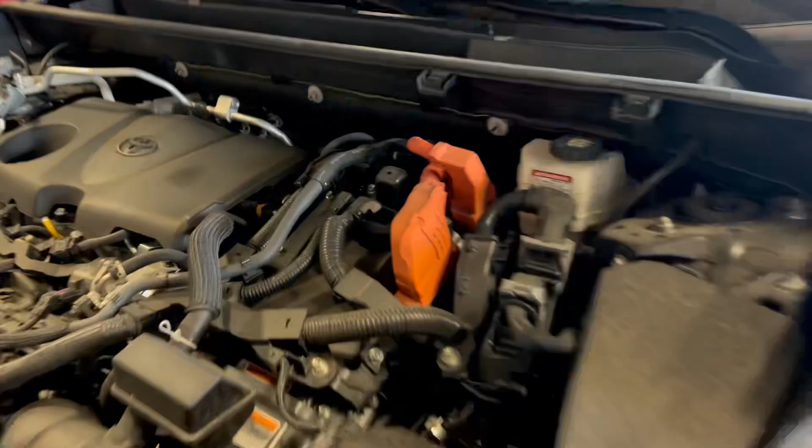Good morning. About to do my 30,000 mile service on my 2022 RAV4 Prime. This is a plug-in hybrid, 2 years old. But it does have a regular gasoline engine. I've got it running on defrost right now, which keeps the gas engine running so it's good and warm. You can see how cold all the lines are, the AC lines. They're freezing, so leaving it in full defrost will start the gas engine. I debadged it, so the badges aren't there anymore, but as you can see, it is a Prime.

Anyhow, I got my filters, my cabin filter, my air filter.

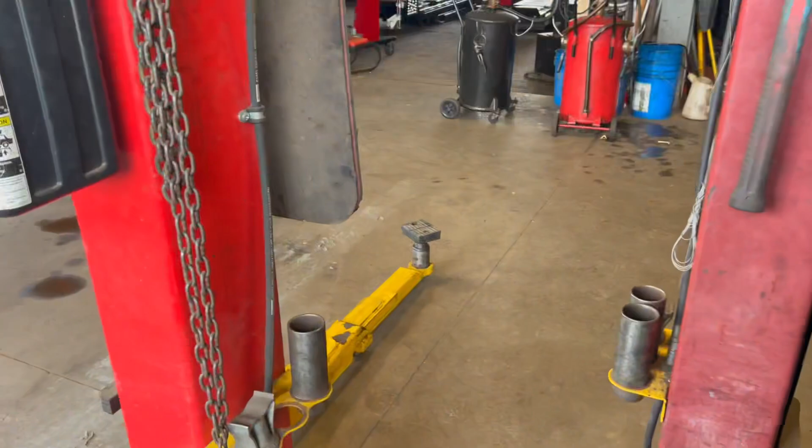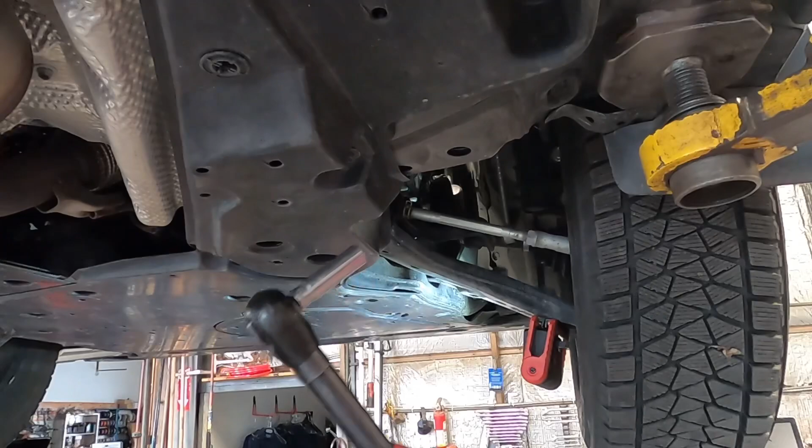The first step to the oil change is taking off the splash shield, 10 millimeter. There's 4 of them. I know I'm cheating, but if you got them, use them. Set that to the side.

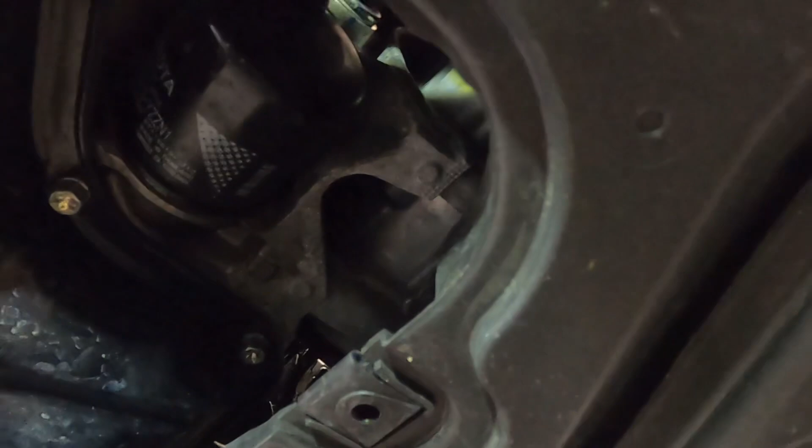And there's your drain plug. And if you look up here in the corner, there's your oil filter. So everything's real easy to do. Of course everything is in really good shape. It's only 2 years old, it's only got 29,800 miles on it.

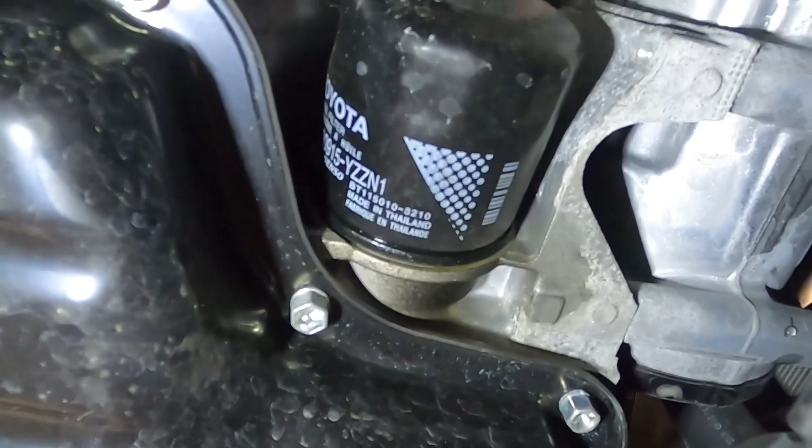And that is your transmission check plug for checking your fluid level, so we'll be checking that as well. And there's your oil filter. So, quick look at the car, shows there's not much going on here to concern myself with.

With the car in the air, we'll do a quick inspection. I pulled the wheels last week, so I won't be doing a tire rotation today because of that.

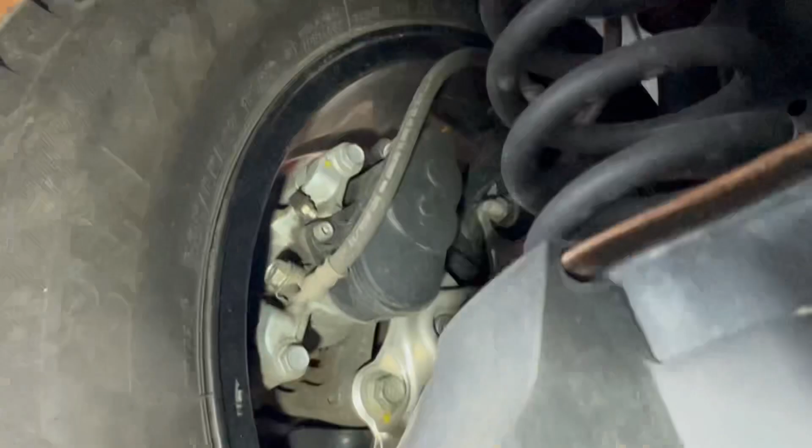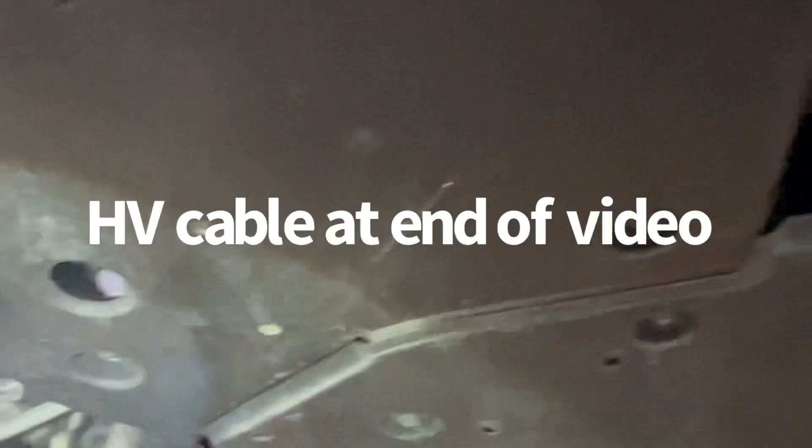Put my winter tires on a week ago. Car's in good shape. Up here is that cable everyone's talking about, the high voltage cable to the rear motor. They call it cable gate. My car is not affected by that at all. I pulled it down and checked it last week. I'll attach that video. Everything's in good shape, and here's the shield for the high voltage battery, the belly pan.

So when you set the car on a lift, you don't want to put your lift pad here. You want to keep them out on the edge here. You can see I'm right in the middle where I'm supposed to be. Same with over here, want to make sure you don't catch this belly pan in here. That shield. Car's safe, it's where it belongs.

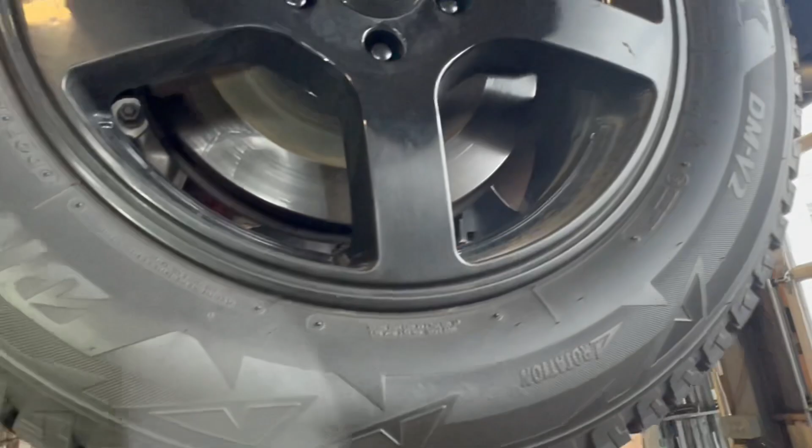And these are my winter tires, Bridgestone Blizzaks, and these are some cheap aftermarket wheels. These tires are amazing. I see they do have a rotation on them, but we won't be rotating tires today—I did these last week, like I said. These are 17-inch, 225, 65, 17s.

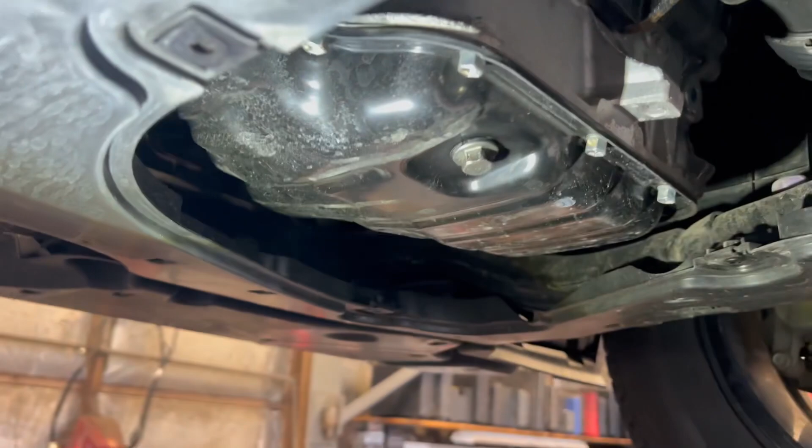All right, we'll start by draining the oil, and I believe this is a 14 millimeter. So I got a 14 millimeter here. Pretty hard to see, but it's 14. And so I've got to come in this way. Wow, that's tight—dealer tightened this, and it calls for 28 foot-pounds, and it was tight, at least that, maybe more. We will be tightening it to the proper amount.

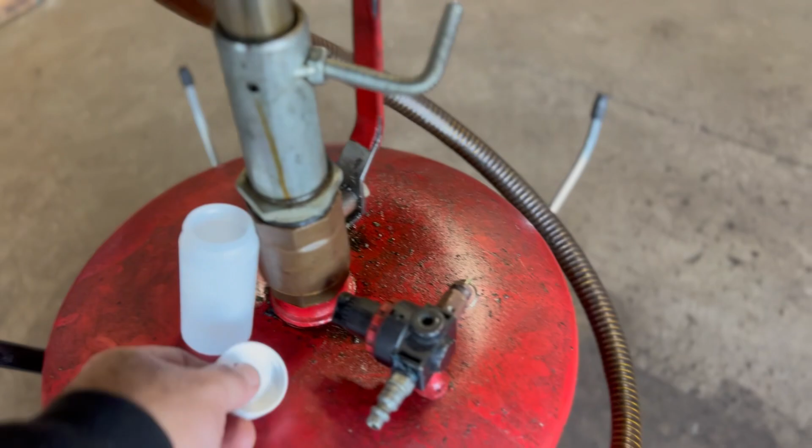Before I drop this, I'm going to get my Blackstone oil container ready to take the sample. Here we got our Blackstone container ready, all set to go. We're going to let the oil run a couple seconds, then take a sample. That's going to be it. All right, here we go.

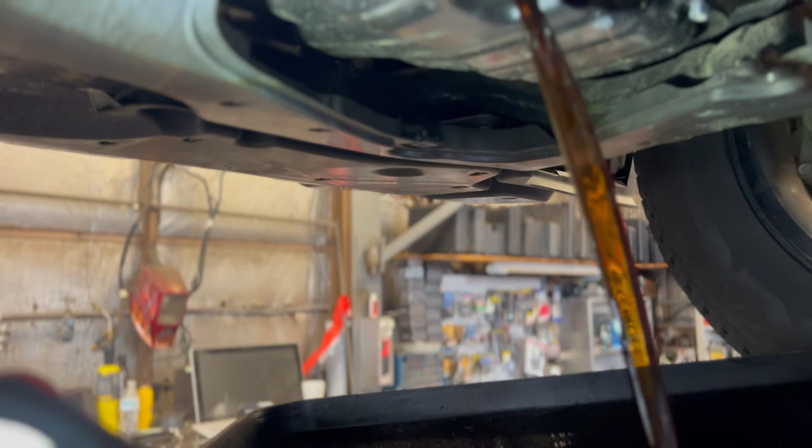Try to do this without making a mess. This oil is probably thin, it's 0W-16, it's like water. Oh yeah. As you can see, it's very clean. I'll pick right about now—1, 2, 3, there we go.

There's our sample. According to the odometer, this oil has 9,900 miles on it. Oh boy, we're leaking—what is going on here? Oh, hit that filter, look at this. Look how easy it is to make a mess. That's because I didn't take that filter out of there. I don't care how much I try, I always make a mess. So anyway, take a minute, clean this up, let this finish draining, and I'll get the oil filter off.

Usually the oil is very clean. Again, according to the odometer, 9,900-some miles on it. But that doesn't tell the whole story—this car is a plug-in hybrid.

All right, we'll do my oil test. That's clean, you don't get much cleaner than that. My oil test is just check the color of it, that's it. Blackstone will test the oil for sure. I don't think it's going to be an issue.

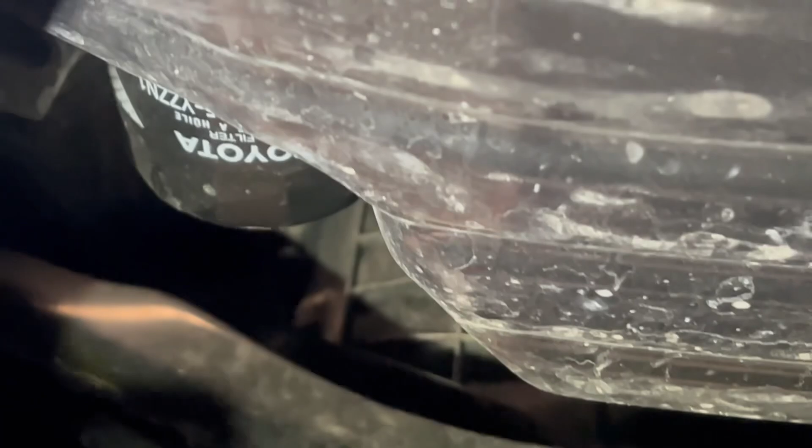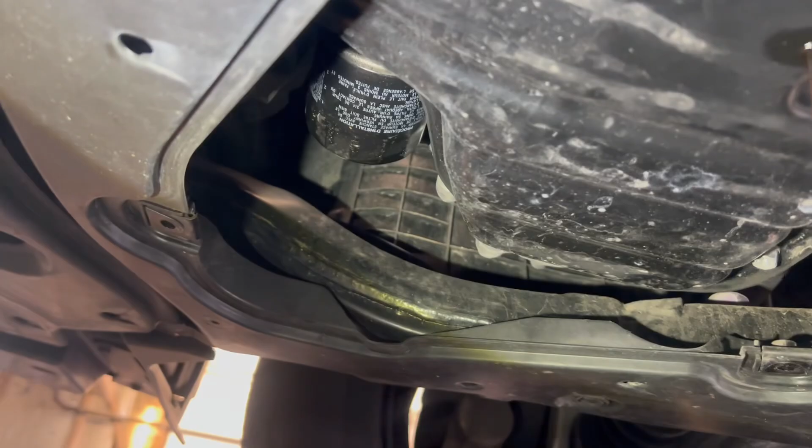All right, time to do the oil filter. Once you got a wrench on it, it's not too bad. Gonna slide forward a little bit so I don't spill nothing, or at least I spill less. I seem to spill everything.

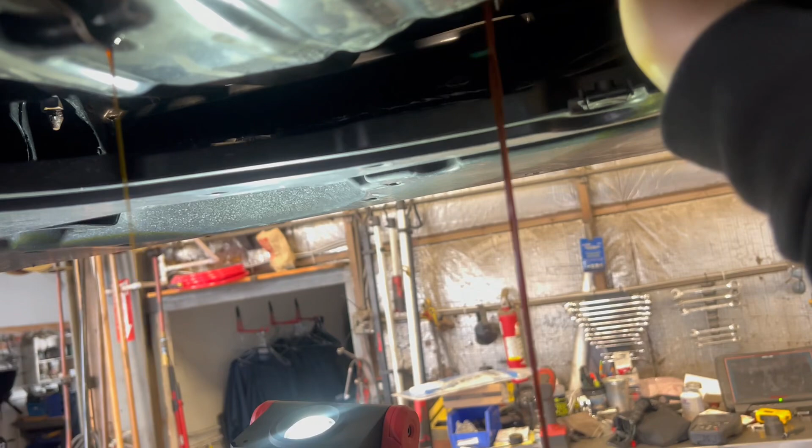Like I said, this has only had 2 oil changes on it. They're both done by the dealer. Let that drain for a minute, and... very clean.

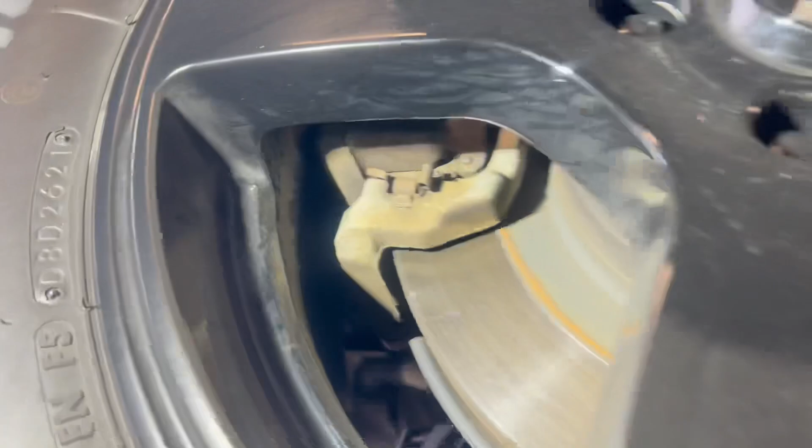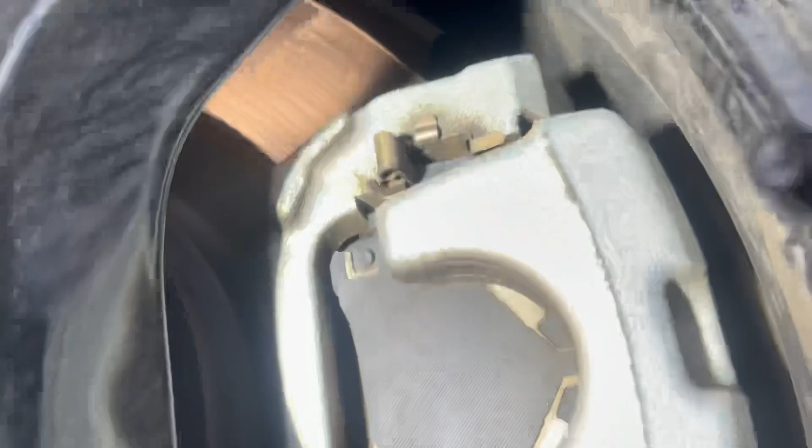All right, the visual inspection on the brake pads. You can see they're like brand new, out at the very top. There's literally no wear on these things. They hardly ever get used. I think they're gonna rust out before they wear out, just because it's a plug-in hybrid. It's got, I believe, 100 some horsepower of regenerative braking. So as long as you're careful about how you drive, and drive like you're paying attention, don't slam the brakes, your brakes will last a long time on one of these cars.

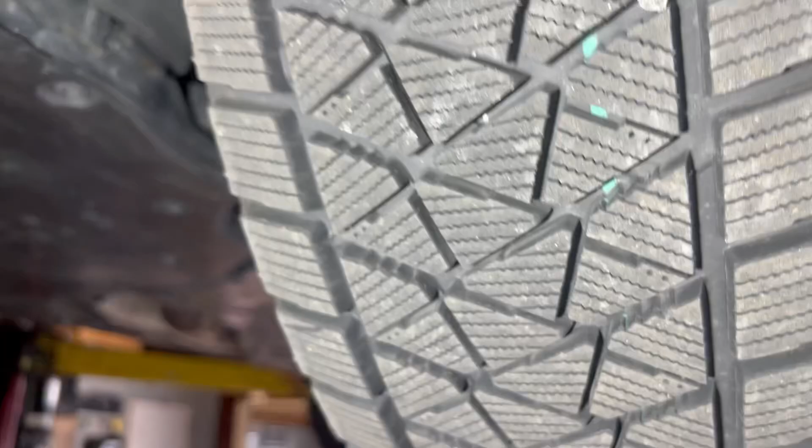Had these off last week. They're perfect. Again, there's a tire rotation symbol. These are Blizzak DM V2s. They're amazing, look at all the siping on them. You can still see the marks. They're brand new, so we won't be rotating those.

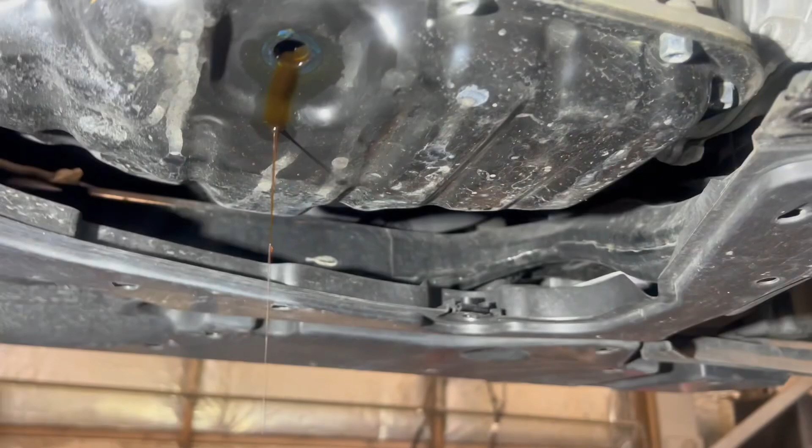Just gonna let the oil finish draining here, and it's really, really clean. In the meantime, I'll get the new filter ready.

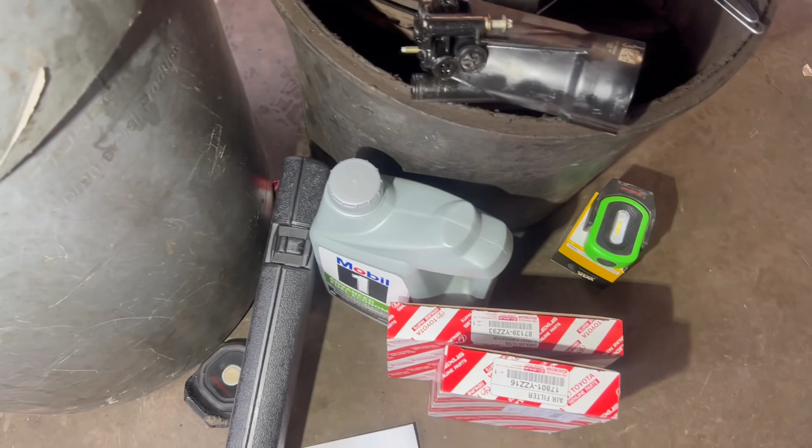We've got some of our stuff over here: our cabin air and engine air filter, our motor oil, and our bill of sale. And hidden under my torque wrench is my engine oil filter. Inside the box is the new crush ring.

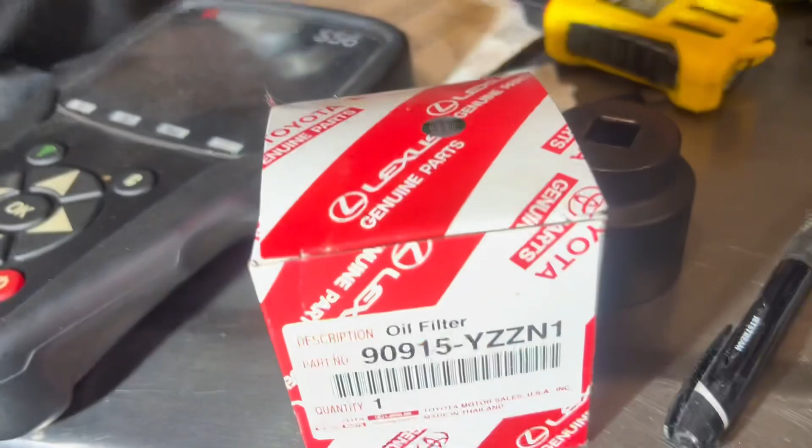Don't know if it's necessary, but from looking at the original, I don't think they ever changed it at the dealer, so I'll do it. There's the part number for the oil filter, there's the crush ring, and I'll get you that part number as well. All right, here's all the part numbers - I believe the first one's the air filter element.

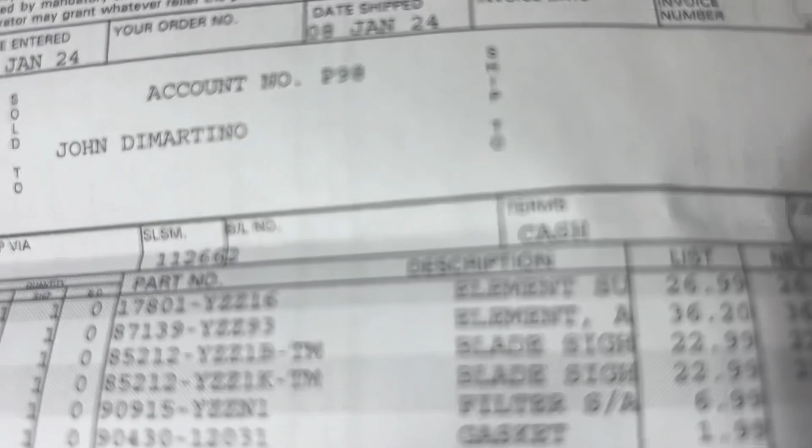They didn't give me any deals, that's for sure. The last car, they would give you 10% off on. Now this place changed hands.

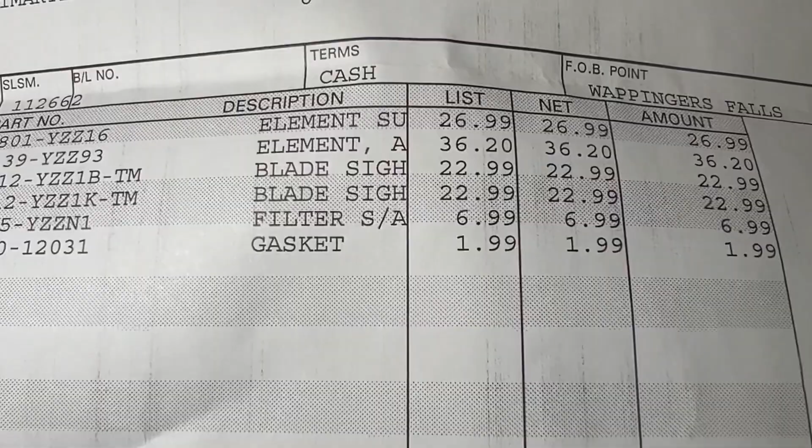The bottom is the crush washer, $1.99 for that little thing. $6.99 for the oil filter, that's fair enough. I also got a pair of wiper blades for it. So all told, with tax, it came out to $127.75.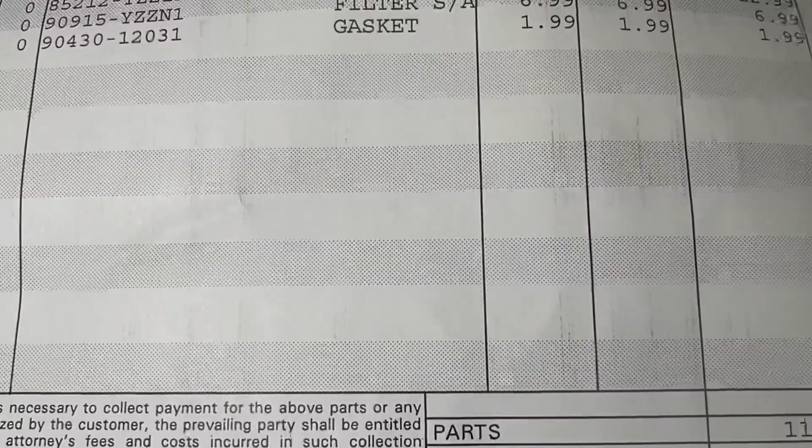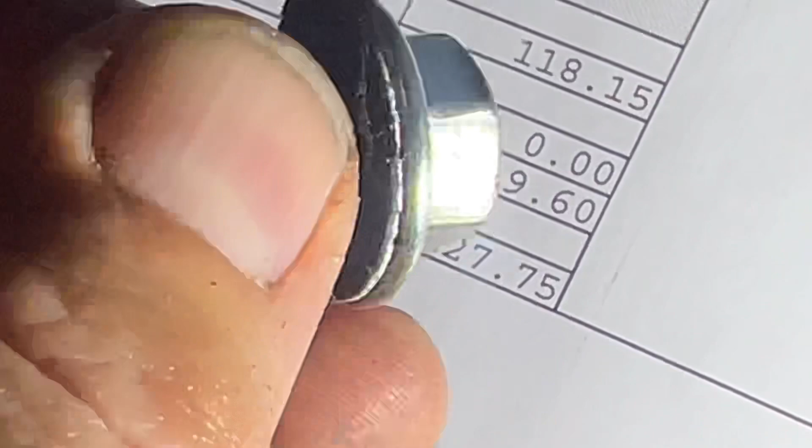And there's my name. So here's the crush washer. Looking at how embedded it is, I'm going to guess that they didn't change it at the dealership - I'm going to say it was used a couple times. It's smushed pretty flat, so I'll try to get it off here. Yeah, I can't get my nail in there.

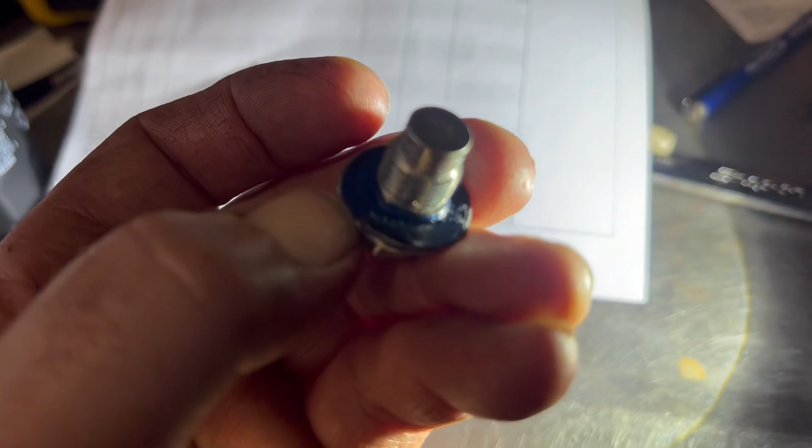We'll get the new one on. I'm gonna have to get that with a little pick. All right, I tried for a couple seconds there - before I cut my fingers open, let me go to the vise. This thing is in there, let me tell you. There we go. Just a shot in the dark here - I'm gonna guess it wasn't changed. There's the old one. Oh, focus is so much better when I zoom in.

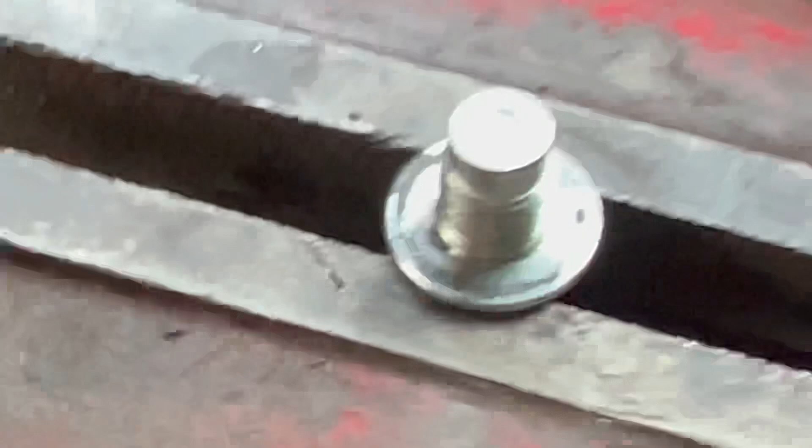So we'll replace that, put the new one on it, we'll be ready to go. All right, old one's off. Here's a new one, and it won't focus again. There we go, there's the new one. I'm glad I got that - definitely needed it. We're going to put it all back together now.

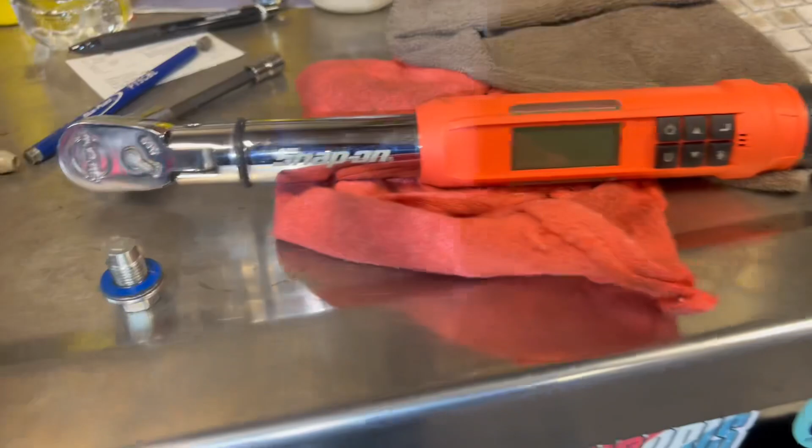Drain plug, socket, torque wrench. 28 foot-pounds, let's go. Really mint.

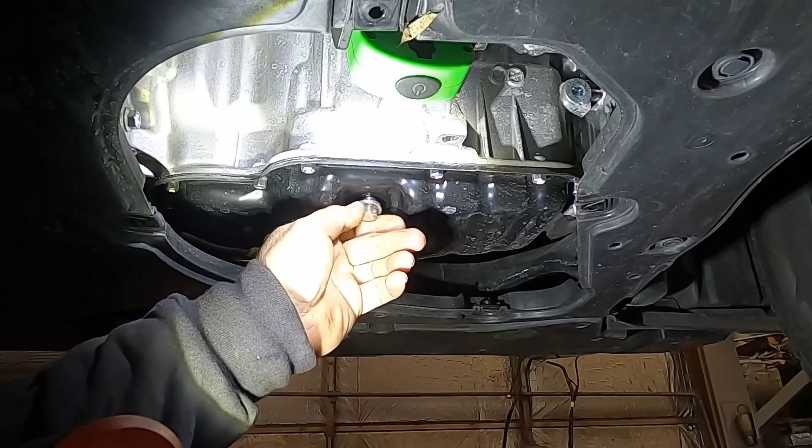At first I was gonna sell it with a bad head gasket. I know I'd get $2 grand for it. Yeah, with a bad head gasket. You're killing me, bro.

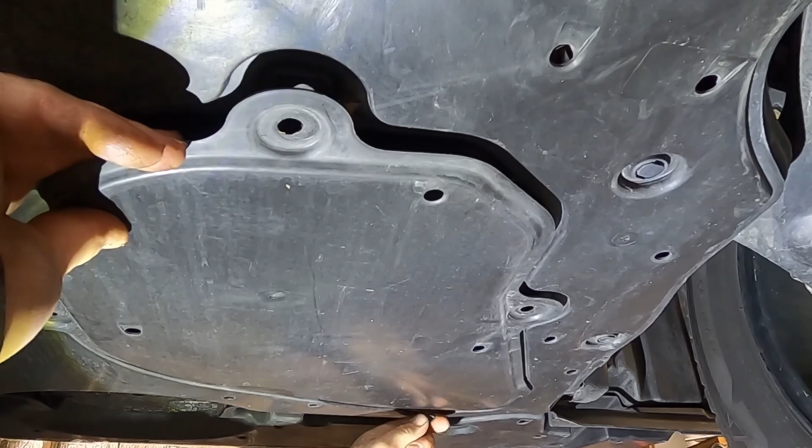It's okay, hang on one second. Now we're gonna put the splash shield back on. It kind of clips in the front, holds itself up. Really? And the rest just goes over.

Don't tighten these too much, they'll strip out. They don't need much.

That's that - where Bella's pet usually is, over by the camera. Your car is so mint, I love it, that's my favorite car in the world. Do you feel the brakes though? Yeah, I got to work on it, baby. I know, it's pretty. I'm telling you, if I was only allowed to have one car for the rest of my life, it'd be that car. Really? Yeah, I love that car. I get so many compliments on it too.

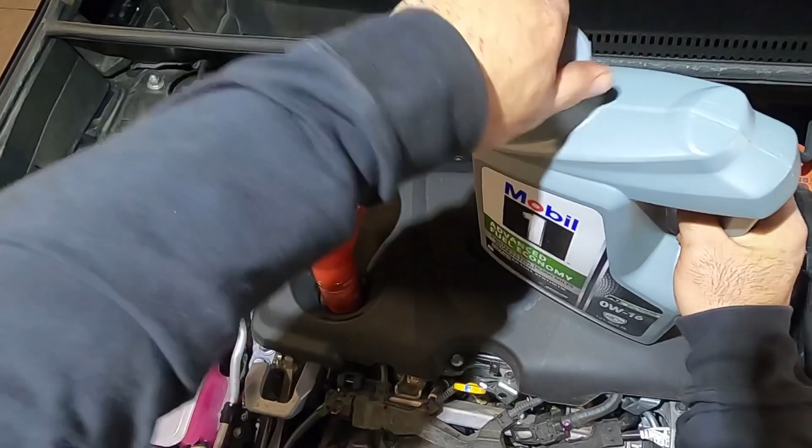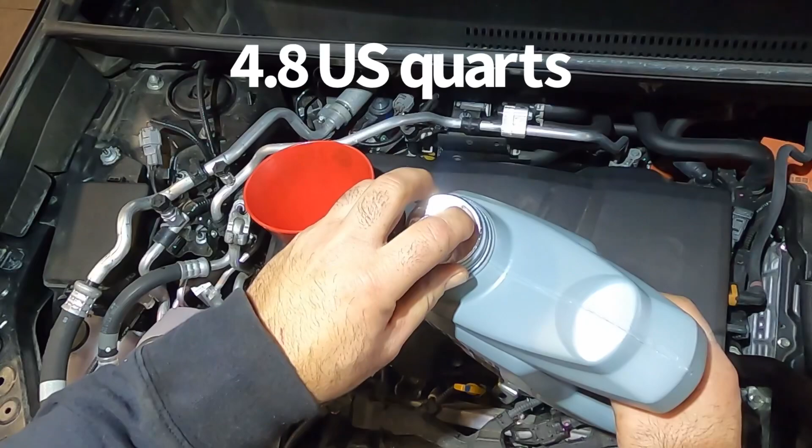Anytime you want - I got a helper here today. 4.8 quarts of 0W-16. Good job, Eve. Thanks, Eve. You're welcome.

Did you get that alert on your phone? The national weather service? Yeah, was it wind? Just about takes the entire jug. What? Where? You know what, somebody told me there was one on Plains Road, and I was just like, yeah, whatever.

Was it like somebody got shot? Or was there a guy pulled out of there?

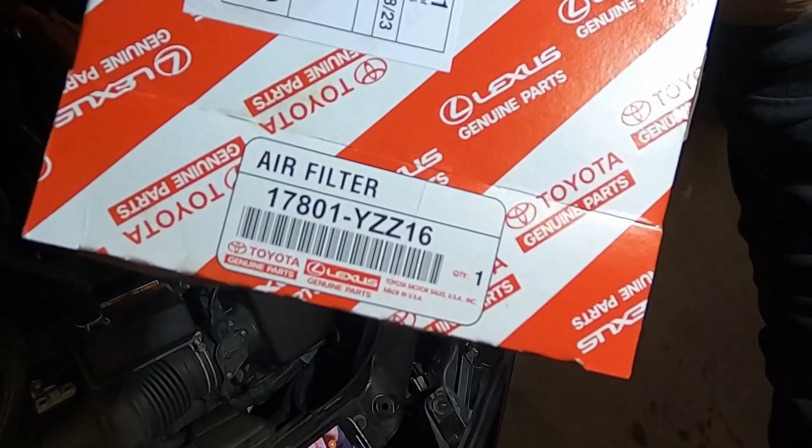Here we got the new air filter. That's the part number. Got 2 clips here, 1 and 2. Pull up and back at the same time.

You got to walk it around the cowl here. You can reach underneath. Slide it out. And there's a new one for comparison.

Put your new one in. Air box is clean, no reason to clean it out. But if it's got leaves or crap in it, get a shop vac and suck it out. Back in.

1 clip, 2 clips. That's it, you're done.

Time for the cabin filter replacement. This one's simple. Take out the contents of your glove box, which I did. Everything's up there.

Oh, the clip fell off. All right. Yeah, hello.

Squeeze both sides. Work it back and forth. Comes down. Then over on this side here, I'm gonna take this down.

You got a clip. Let me put some light on it. This clip right here, just lightly pull on it. It comes right off. And when that comes off, this comes down.

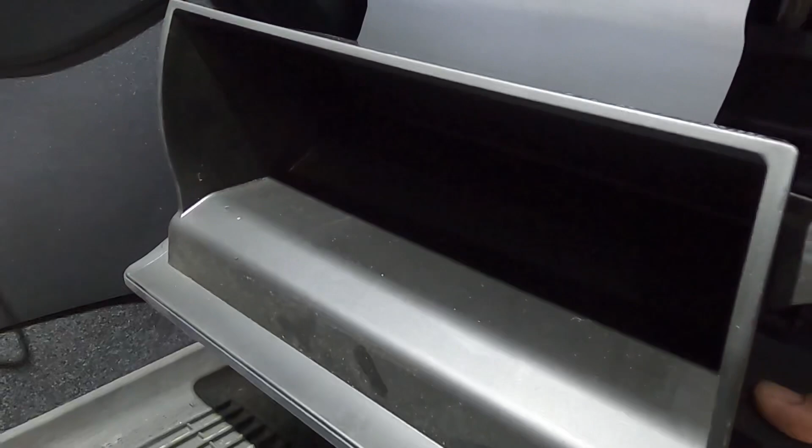Oh, look at this, I got papers behind there. And then I'm gonna move the light. It's hard to see with the light now.

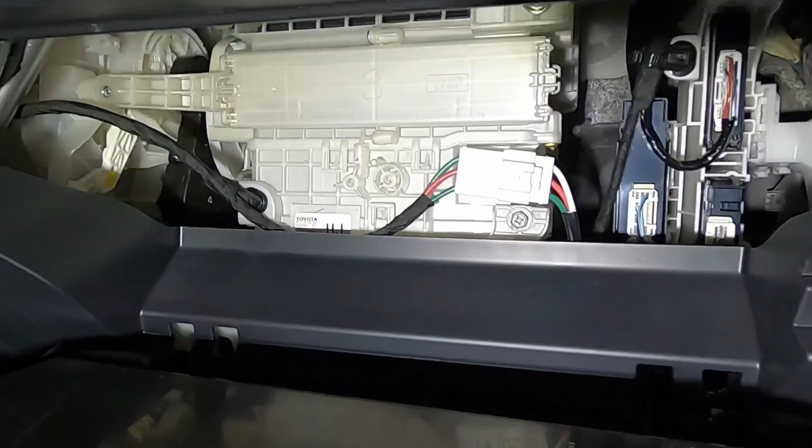That exposes your cabin filter. Alright, with the glove box down and out of the way, it looks like it's coming right off here, but I don't see any reason to take it off.

This side's loose. It's not—oh, there we go. It's out now, it's not in our way anyway. You look up here.

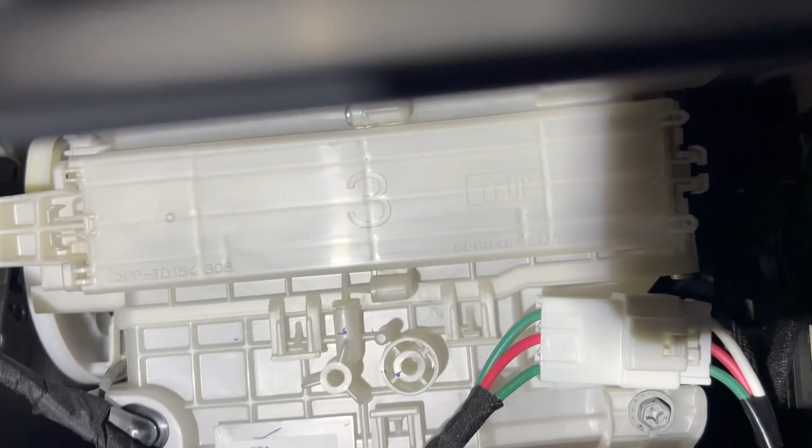There is the cabin filter. I'm just gonna lightly pry over here. I'm looking down here for the first time with you guys.

Okay, looks like you squeeze these tabs. There goes my light. Squeeze the tabs. Off it comes.

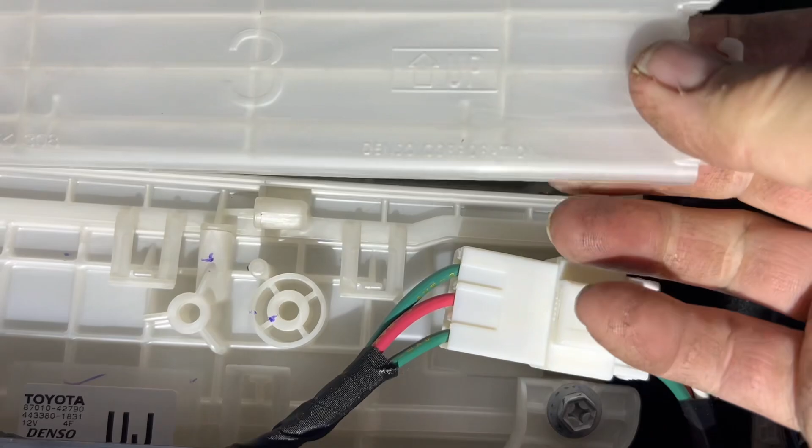And you gotta have the cabin filter in this housing. There it is. It's really not that bad. I can adjust the light here.

My Corolla's was a lot— oh yeah, no, it's bad. It's dirty. So we'll change that. It definitely needs to be changed.

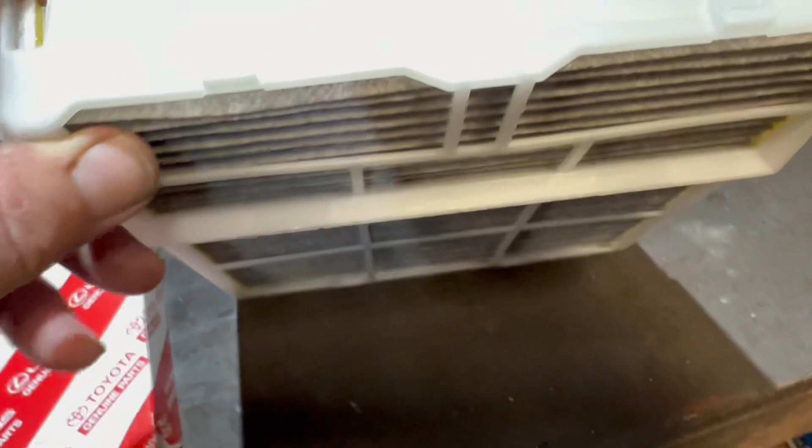All right, we got the cabin filter here. There's the replacement. On the filter, there's an up arrow. On the old one, on the plastic, there's an up arrow. So this isn't too hard.

All you really got to do is kind of pinch this in. Doing this with one hand now. Remove it. You got your up arrows here. You're going to put this in the same way.

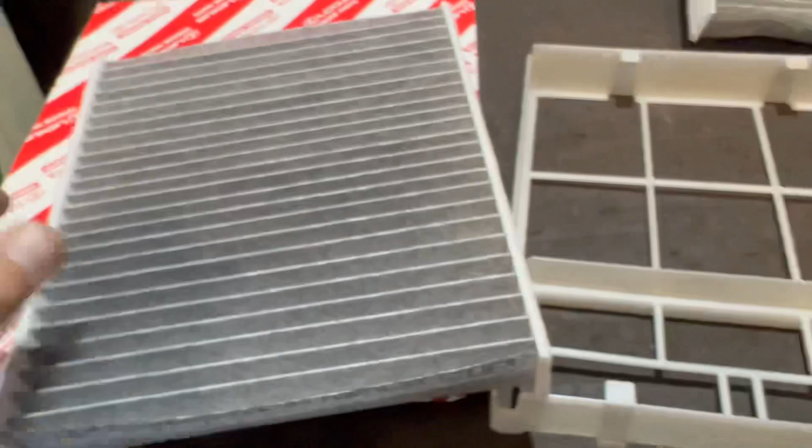That's it, really kind of simple. I'm going to reinstall it. I thought this was dirtier than it was. It looked really dirty, it is actually dirty, but it's not horrible.

I don't really drive in a lot of dusty conditions. So we'll put this back in the car now. We'll be all set.

All right, we're going to reinstall. Here's our up arrow.

It's pretty simple. There's no debris in there, so we're not cleaning nothing out. This car is garaged, so it's not parked under a tree or anything like that.

Just pick it up in. It's all the way in. Take your cover, just the way it came off.

One side's got clips. Looks like they can go either way. There's clips here. Clip slides in here.

You bring this side over, you squeeze the tabs. That's in.

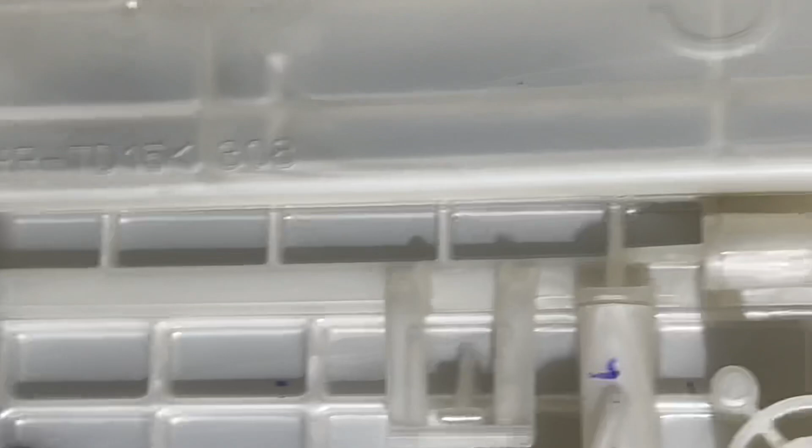Tabs are in and locked in. Clips are in. Looks like it can go either way.

Then you simply replace your glove box door. Looks like it just snaps in place. Put your glove box door back together.

Make sure you're in your proper spots here. Then you're going to pick it up. You're going to engage these clips, these tabs, which they'll do on their own.

You'll watch here when I do this. Just pick it up and just lift. It snaps right in place.

Now over here, you got that clip. I'm right-handed, it's hard for me to do that way.

Come over here, grab this, snap it on, and that's it. You just test it. That's it, you're done. Reinstall everything you had in your glove box before.

This last clip actually took about a year ago. It's the cleaning of the DC to DC filter. It's under the rear seat. It's really easy to do, but I wanted to include it for those who didn't know how to do it or where to find the video. It is part of this service, and most of the time it's perfectly clean.

My car, nothing was really bad on it, but I keep it in the garage, and we don't have anything really dusty around here. Most of my miles are driven in electric anyway, so the oil was clean, everything was good. I probably could have just gotten away with doing an oil change, but I did everything just like the manual suggested. I bought it all at the dealer, and if they question the warranty, I'll direct them to my video.

Hope everybody has a great night, and everybody does their own services. It's the only way to make sure it's done right.

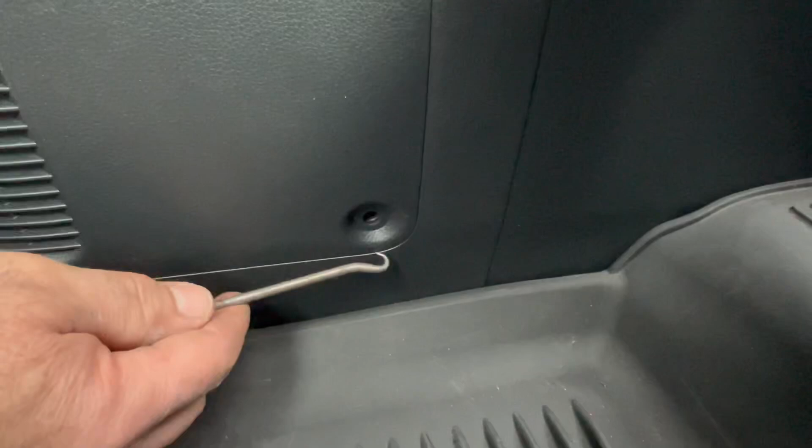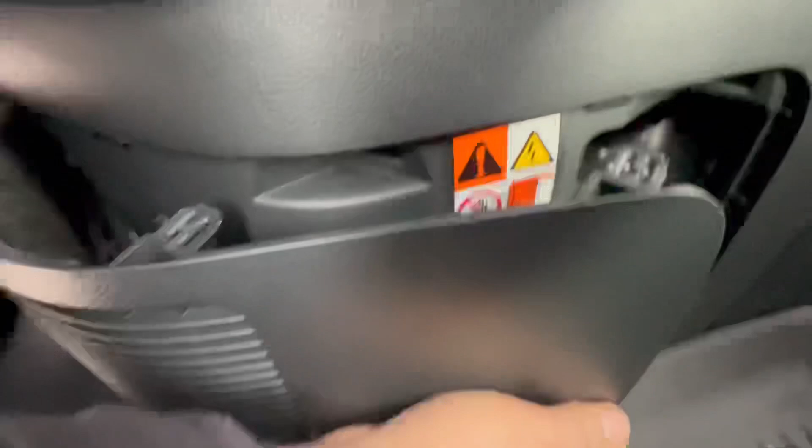Don't push in hard or it'll strip, it's plastic. If you grab it, it comes right out. Once you do that, I take this little hook tool I got and I'll just get in behind it, like this. Working one-handed here, I'll work my way around. You kind of got to pull out and towards the passenger side, just like that. You can see there's the clips.

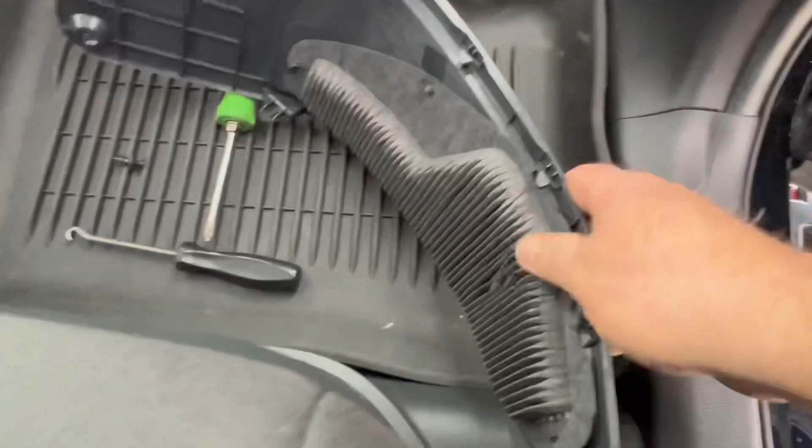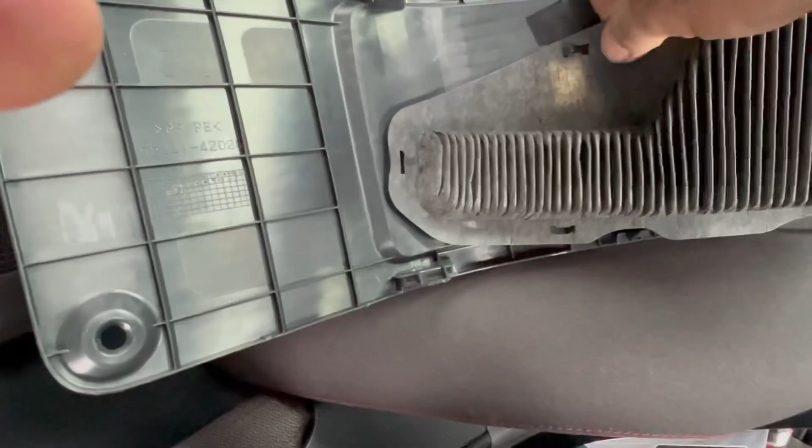And here's your filter. You're looking at the back side of this filter. So what you have to do is, I'll try this one-handed, you need to remove this. Looks pretty easy to do. There it is, it's off. Turn it over, there's the dirty side.

I've got this vacuum here, I'll just suck it out. It's not even dirty, but I'm gonna clean it anyway. Then you reinstall it, and that's pretty much it. Takes about 5 minutes.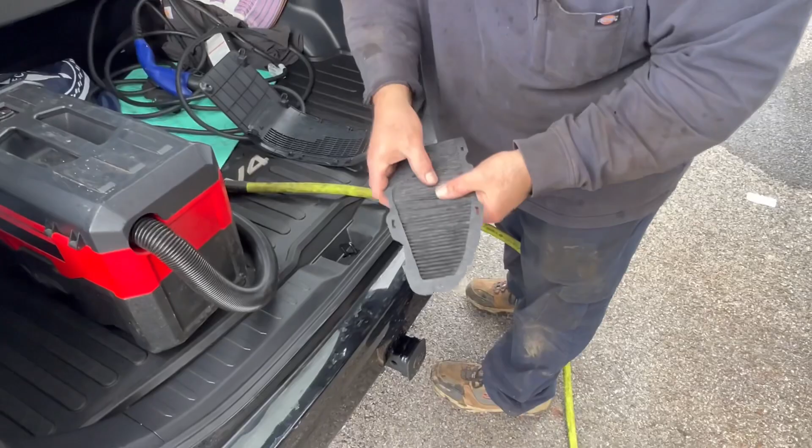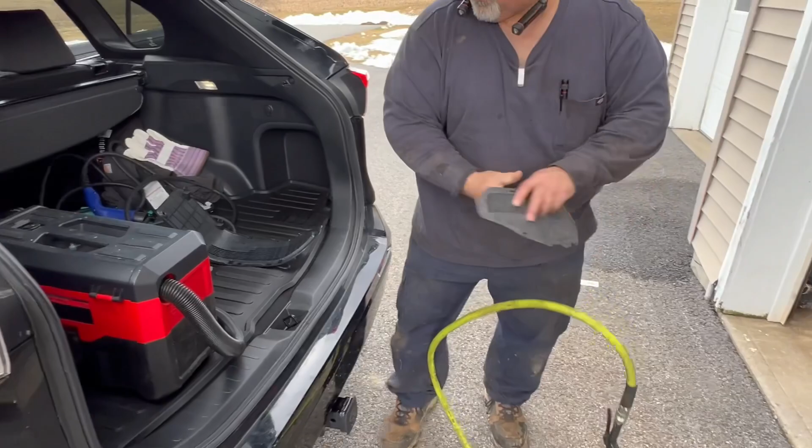All right, we're gonna remove the filter. We're gonna clean the back side of it, because when it's installed, it's pulling air in here. This has 13,500 miles on it, as you can see. It's very clean, so I'm going to start with just a little light pressure backwards. Very light. Then I'll use the vacuum and suck out anything in there.

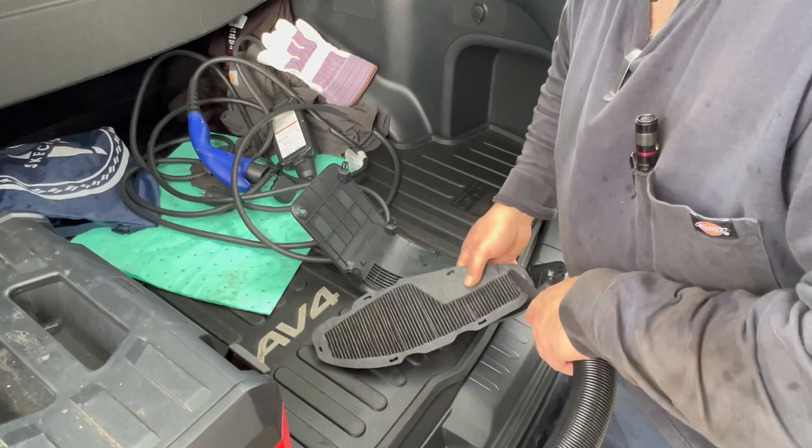Honestly, it's clean. Then just put it back in. It's really not that big of a deal. It's got little tabs you line up. You reinstall it the same way you took it out. Looks like I did it backwards, so we'll fix that.

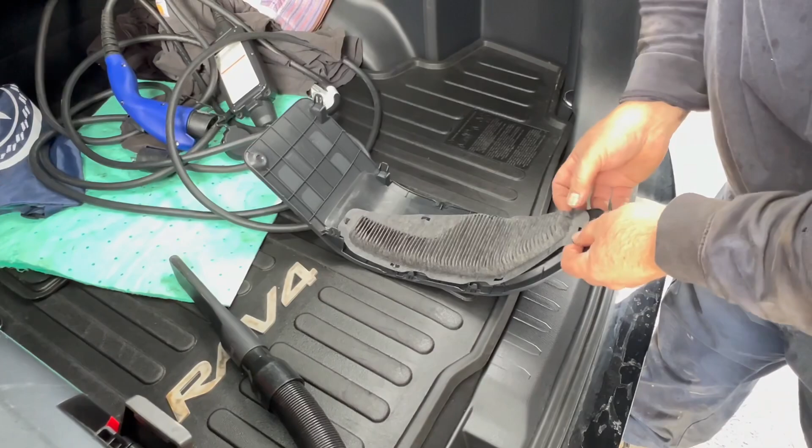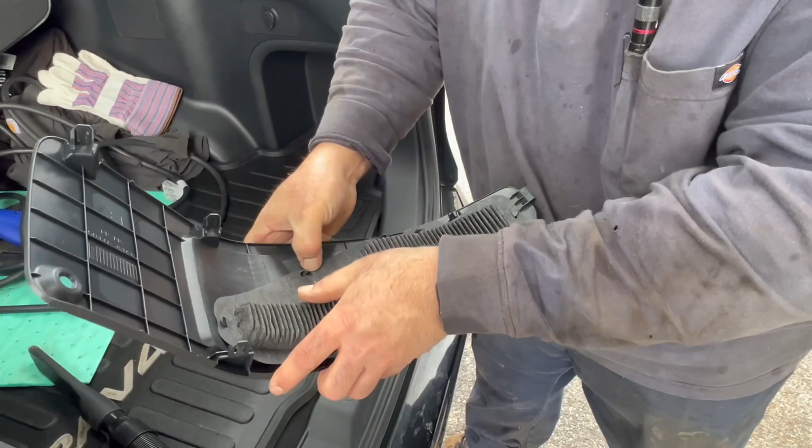These just pop in. The hardest one is the beginning and the end, and they snap down in. This one's fighting me. Okay, all the tabs are in. Just simply reinstall it, you're done.

All right, now we're gonna put it back together. This is not really hard. That's kind of where that cavity goes. I pop the back seat up, see inside from here. Really not a big deal to put back in. You just got to watch your tabs.

Make sure everything's lined up. I start in the corner here, like that, and bring it around. Make sure all your tabs are lined up. They are, and start pushing in. Back in, that's it.

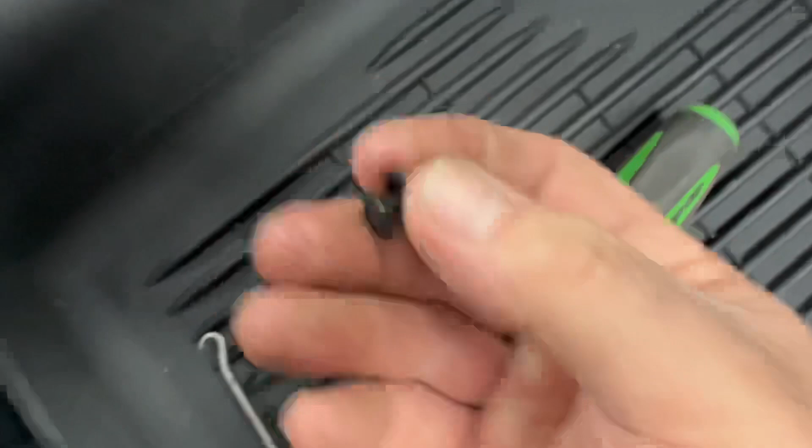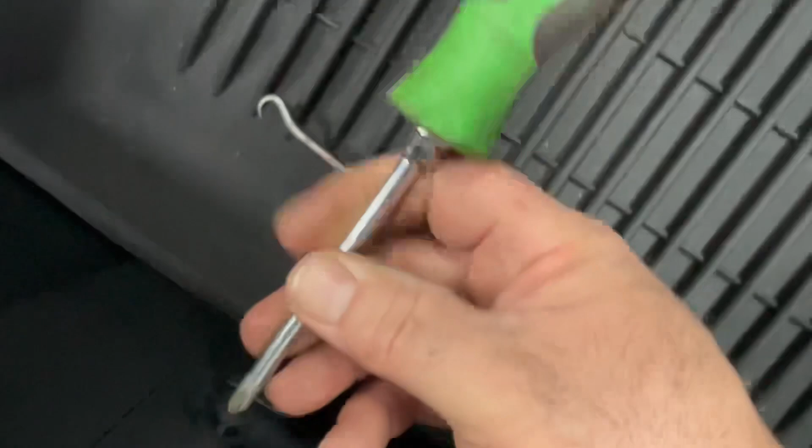Apologize for that. Take your screw and reinstall it. You can force it back in and just push it, but once you strip it, it gets kind of weak. You don't got to tighten this much, just put it until you feel it dragging. That's it.

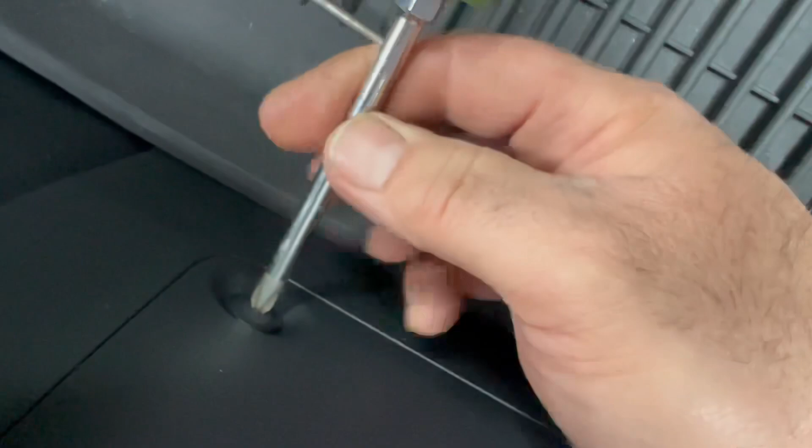Get your tools, confirm that all your clips are in. And they are. In this case, I'm going to smack my seat back down. I took it out, and literally, it's a 3 to 5 minute job.

I believe this is the same on the hybrids. You don't even need compressed air, you don't need that. You could just use any kind of vacuum and suck it out.

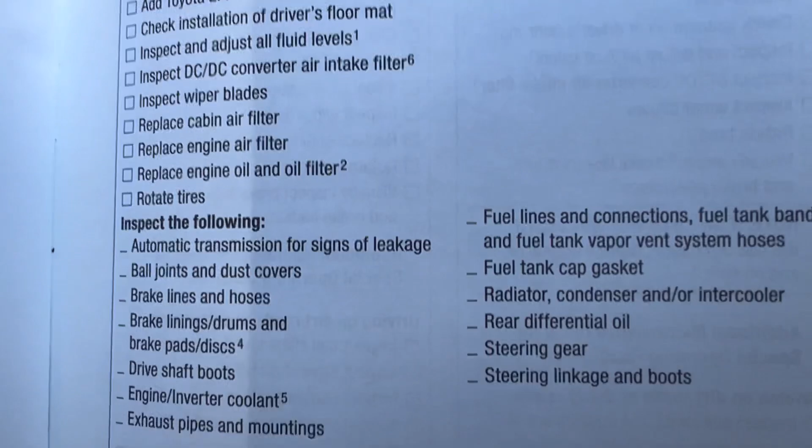All right, I'm on page 41 of the maintenance log manual, and I went down to the 30,000 mile service. We did everything here. Major things to concern yourself with are the fluid levels. Check them. Inspect the DC to DC converter, air filter.

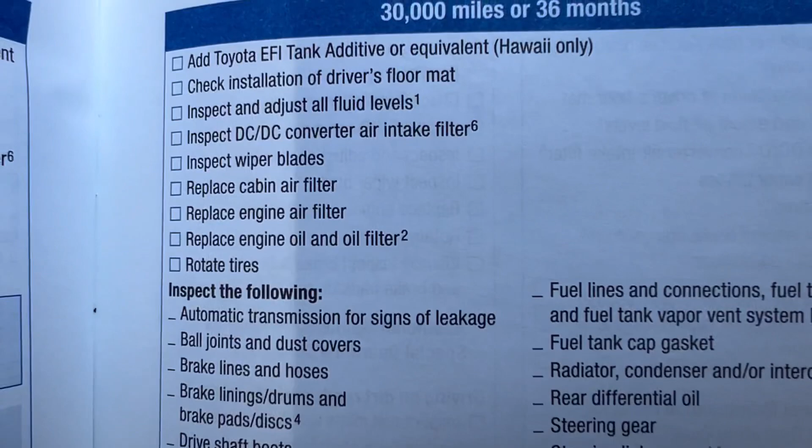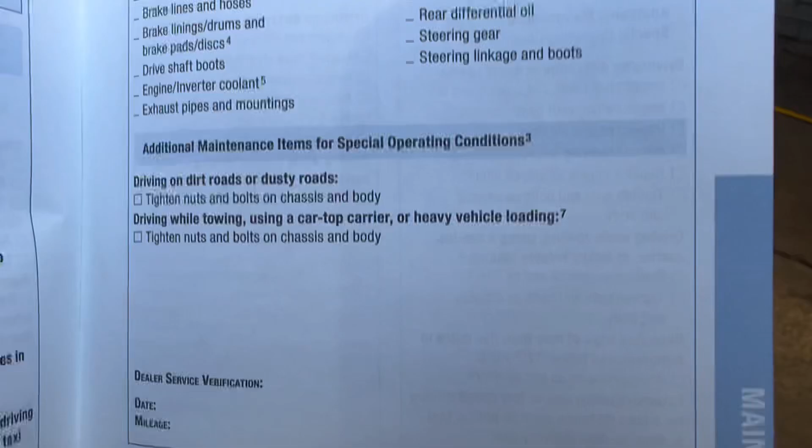I've done that. Wiper blades, I've got new ones. Replaced the air filter, did the oil and filter, rotated the tires, and also replaced the cabin air filter. And I'm looking here, we did all this. We checked the automatic transmission for leaks, we checked the ball joints, we checked the fuel system, we checked everything. So neither one of these conditions apply to me. So basically we're all set here.